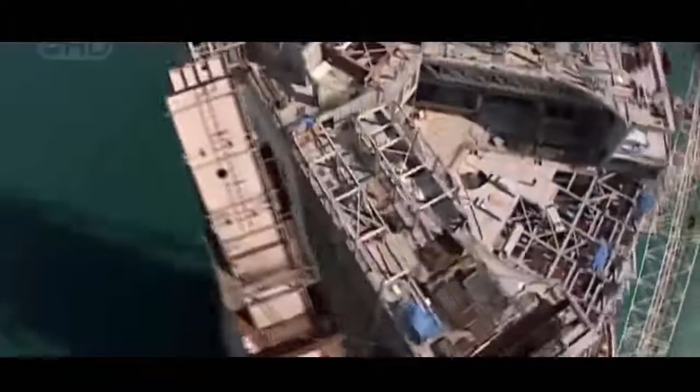Out off the coast of Dubai is one of the most incredible buildings on the planet. At 321 meters, it soars higher than the Eiffel Tower. It's the tallest hotel on Earth, and possibly the most luxurious. A structure designed to amaze. Its name means the Arabian Tower. This is the Burj Al Arab. But creating this 21st century icon will be an epic struggle that pushes everyone involved to the limit.

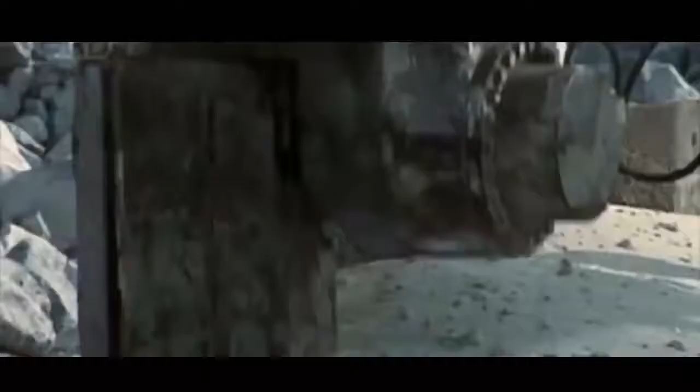In November 1994, construction begins on what is planned as the world's tallest and most luxurious hotel. The pressure is on from day one. With the eyes of the world watching, no one on the project will want to disappoint this particular client. Sheikh Mohammed bin Rashid Al Maktoum, Dubai's crown prince, is the visionary behind this amazing building. The project is his response to the economic time bomb his country confronts.

As his close advisor, Sultan bin Sulayem knows all too well. He knew that we don't have oil. He knows that oil is going to end someday. And they have two choices. Either go and do something about it and find other alternative ways to sustain the life for the people of Dubai, or sit waiting for help.

Only 50 years ago, Dubai's a dusty backwater, home to pearl divers, coastal traders and Bedouin. Then, in the 1960s, prospectors discover oil. The sudden injection of billions of petrodollars transforms the sheikhdom. But geologists predict the oil boom will be over by 2016. The good life could end just as quickly as it began, when the wells run dry.

The answer to Dubai's economic survival lies in its geography. This tiny emirate, less than twice the size of London, is in the remote Arabian Gulf. But Dubai has three untapped assets: sun, sand, and sea. Facing future economic meltdown, Sheikh Mohammed makes a crucial decision. He will turn his country into one of the world's most exclusive holiday destinations, a playground for the rich on the Arabian Gulf Coast. The Sheikh needs a luxurious centerpiece to launch his country into high-end tourism.

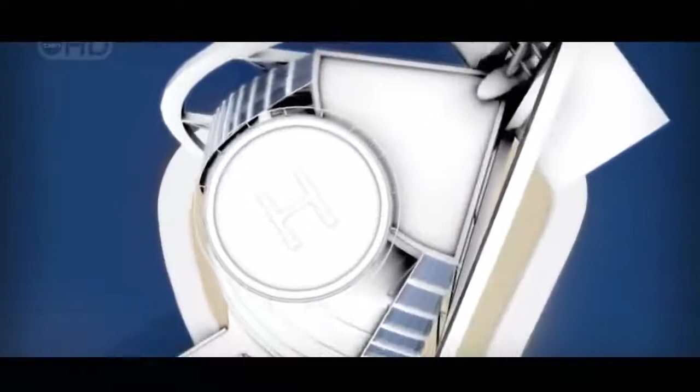He stakes what some speculate is over $1 billion on the tallest, most lavish hotel in the world, with a unique 7-star reputation, the Burj Al Arab. I think it was very important to put Dubai on the map of the world. There's no hotel like this hotel. It takes guts, and Sheikh Mohammed has a lot of guts.

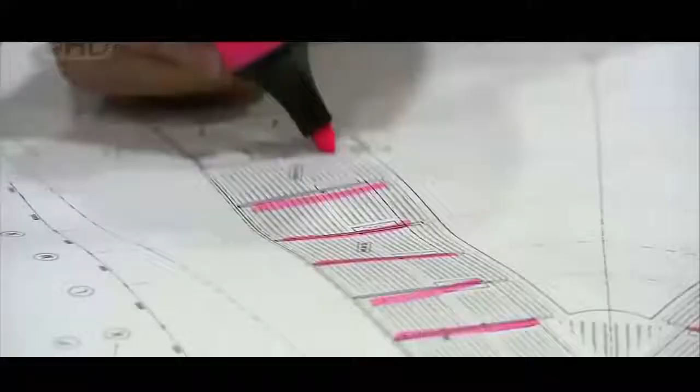The Sheikh's courage is clear from his choice of architects. A radical young team from Britain, brave enough to take up the challenge, but very short on experience. They are led by Chief Architect Tom Wright. We had an average age of 32. Not a grey hair between us. And none of us had gone over about 15 stories. I was quite staggered by the scale and the immensity of the project. Tom Wright and his colleagues have a reputation for innovative engineering, but they're more used to designing schools and offices.

But Dubai is a place where connections can make all the difference. Through a contact in the ruler's office, the team gets its break. Sheikh Mohammed agrees to a meeting and is so impressed with their initial concepts, he awards them the contract. Now Wright must turn his sketches into a design so remarkable, the building becomes a world-renowned landmark. We had many sleepless nights worrying that the building we'd designed wouldn't turn out to be at all iconic. Wright knows he must push his design to the limits.

A building only becomes an icon when its form is simple but unique. We decided that if you could draw a building simply with a few strokes of a pen, and it was instantly recognisable as not only the building but the place, Egypt in this case, you'd created something that was iconic. So if you consider these buildings in the world, there are probably no more than 10 maximum that have actually achieved this status. Australia, Sydney Opera House. As with all these buildings, it's usually just the first couple of lines that actually make you know exactly where the building is. Paris. And you have to put a flag on the top.

Can Tom Wright and his team compete with the likes of Gustave Eiffel? This is a once-in-a-lifetime challenge. All the brainstorming pays off when Wright finally has his eureka moment. We were sitting there having a beer, watching the modern sailing yacht come out of the Dubai Offshore Sailing Club. You think of excitement, you think of exhilaration, and we went, hey, this must be the one. The form we came up with is very simple, and within a few lines, I think you can see that it has all the elements of an iconic building. It's simple and instantly recognisable.

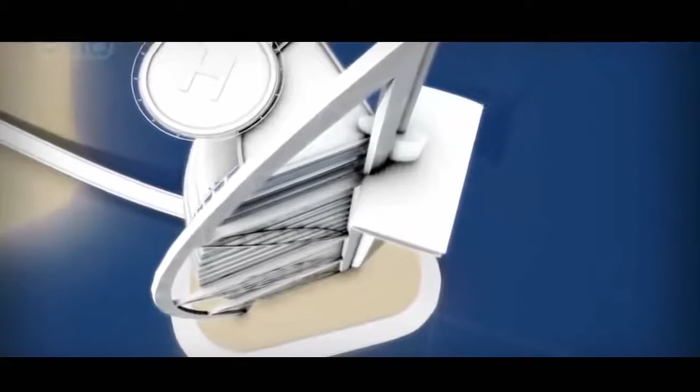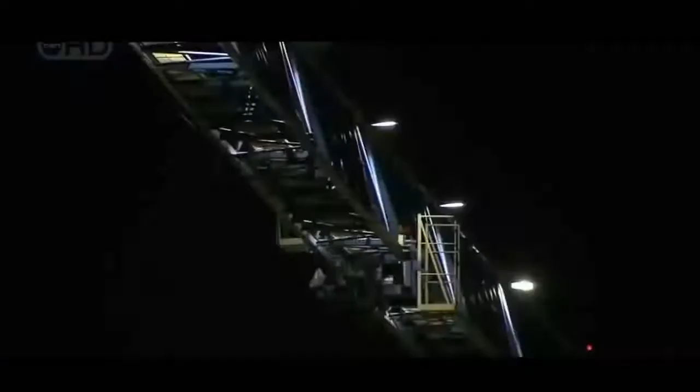By early 1995, the construction team is hard at work on Phase 1, building a low-lying island. But the inexperienced architects are about to get a taste of Dubai's extreme weather. April the 27th, a powerful storm known as a shamal sweeps across the Gulf, hitting the coast with a vengeance. A set of construction barges lie in its path. Each is laden with 10,000 tons of rock.

The architects have planned for all weather conditions, but the storm's intensity still shocks Simon Crisp. We had 3 or 4 metre waves bashing onto the beach. To see the waves coming in like this was really quite a wake-up call for us. One huge barge breaks loose and slams into the mainland. The team realizes the damage this kind of storm could inflict on their island hotel.

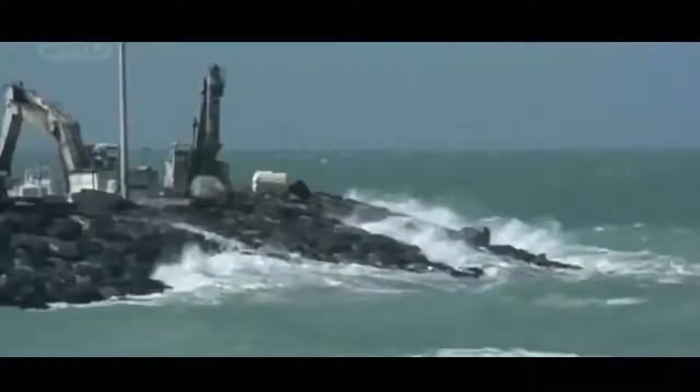We had a really graphic example of how powerful the Arabian Gulf can be when it's angry. The architect's decision to expose their structure to these forces could have serious consequences. The engineers will have to struggle to produce a low-lying island capable of resisting nature's fury.

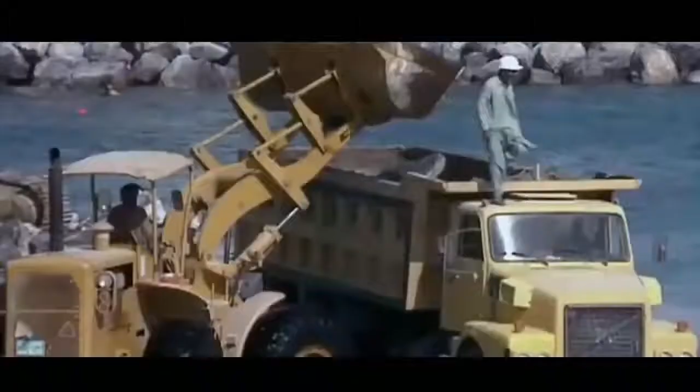The man-made island for the world's tallest hotel has hit a critical stage just 5 months into the build. Dubai's Sheikh Mohammed is depending on this project, the Burj Al Arab, to convert his country from oil producer to top-class tourist destination. But a debate rages over the island's height. Architect Tom Wright wants to make it low to give the impression of a sail rising out of the water. We argued a lot about the height of the island. From a design point of view, I wanted people to be close to the sea.

From the start, he's gone head-to-head with engineer Mike McNicholas, who's responsible for the island's safety. So I wanted the island as low as you possibly could, you know, skimming the sea. I'm coming from the other end, needed to make sure we were protecting the island. McNicholas's worst fear is that waves breaking over the island could damage the hotel or even drag guests into the sea.

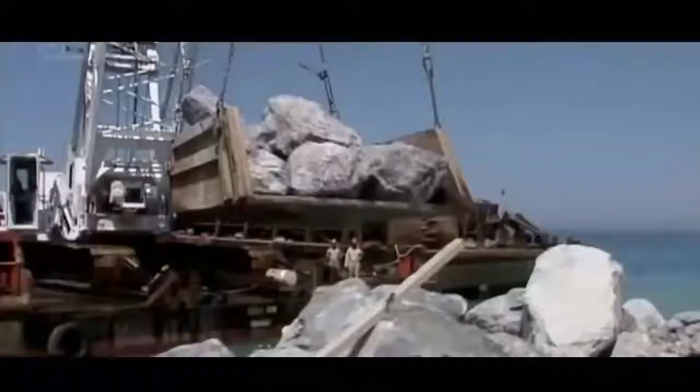Initially, the engineers planned to build the island using rocks. They are available locally and the technology is proven. But Wright rejects this. A rock island would have to be far too high to repel the sea safely. To keep the island low, McNicholas experiments with pioneering concrete blocks designed to reduce the impact of waves. But no one in the Gulf has ever used these blocks before.

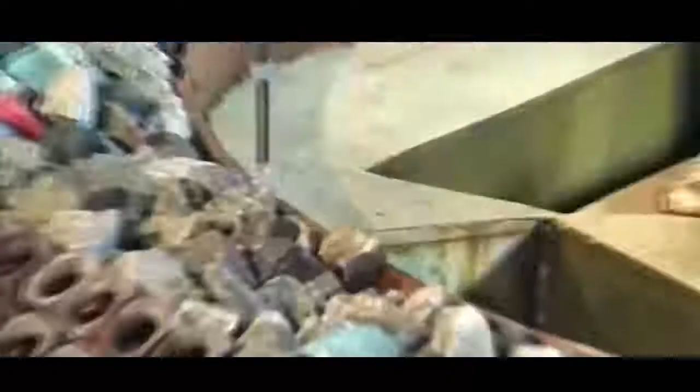I had to insist with the team that we carried out tank testing. It was the only way we were going to be sure that the island would be safe. These tests replicate the power of the tallest waves that can occur once in 100 years and send them crashing into a series of differently configured models. 3 weeks of testing prove the hollow blocks will work.

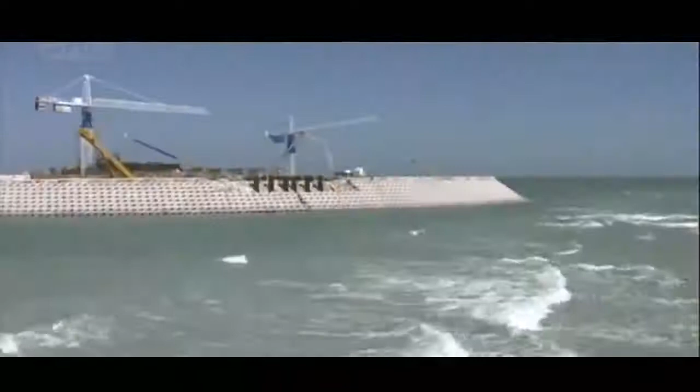The construction team builds the island with steep rock slopes, then covers them in concrete armor to absorb the force of the waves. These ingenious blocks work like a sponge. As the wave hits, the water passes inside the space and turns around on itself. The force is largely dissipated. With the engineers' help, architect Tom Wright has won his battle for a secure island that rises only 7.5 meters above the waves. Now the team begins the second stage of construction.

In the center of the island, construction workers drive huge lengths of steel 20 meters into the ground. This creates a triangular steel wall known as a cofferdam, which will become the outside of the hotel basement once they excavate the sand from inside.

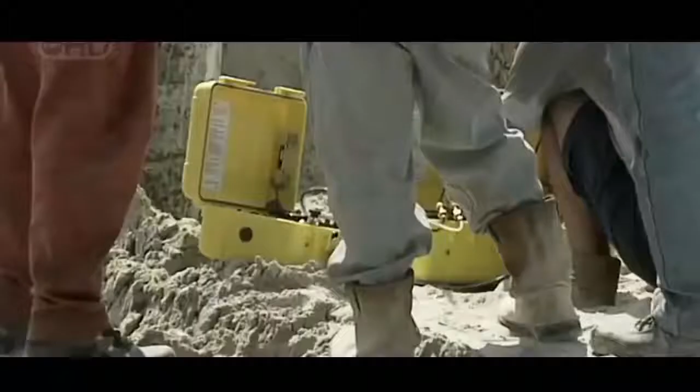But removing the sand could be dangerous. That was a real challenge for us. It's sleepless day and night, 7 days a week. How we were going to stop the seawater coming into the structure, how we were going to stop the seawater coming around our structure from beneath and flooding it. The weight of the sea is a huge force on its bed. This pressure forces water through the sand and threatens to flood the artificial island from beneath.

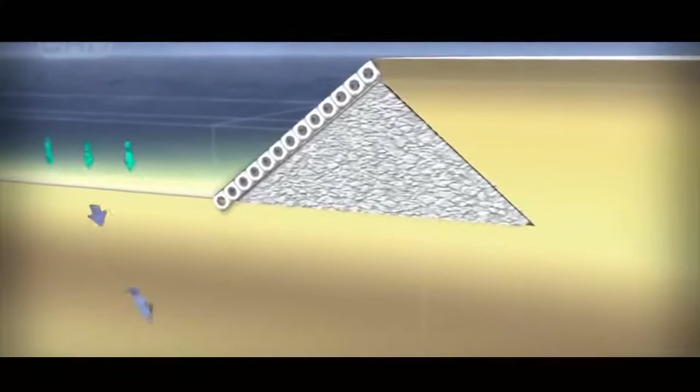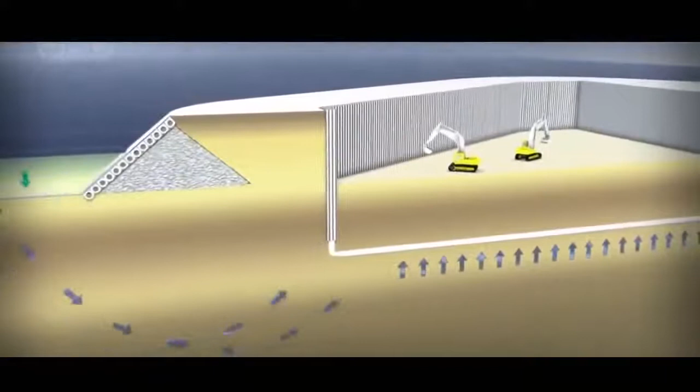To keep the sea out, McNicholas injects liquid cement into the sand to seal off his steel wall from below. But as the sand is removed to form the basement, there's less and less weight to hold back the force of the sea. The cement seal is going to be tested to the limit. In the worst case, the pressure caused by that water movement could have blown the whole bottom of the excavation like a champagne cork.

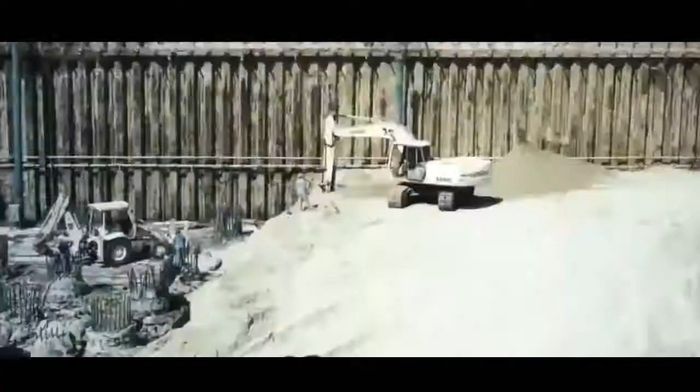If McNicholas's calculations are wrong, the excavation could be swamped, killing hundreds of workers. But he stands by his design. With the cement seal in place, the excavators begin to remove the sand. As the man responsible, he's not going to let the workers face the risk alone. I felt I had to be one of the first guys down at the bottom of the excavation, looking up 10 meters above myself, thinking, each side of this cofferdam is 7,500 tons of sea pressure pushing in.

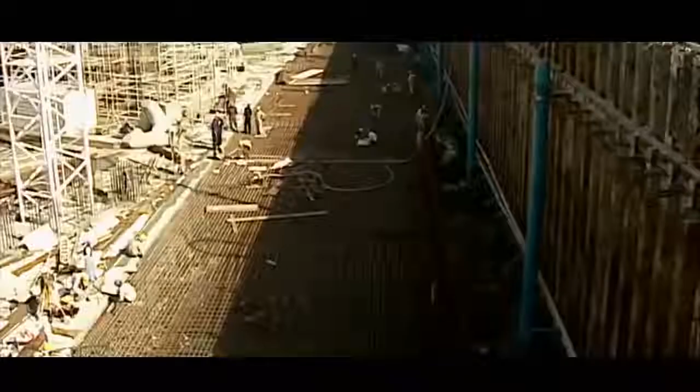When put to the test, both wall and seal hold firm. And one of the probably proudest moments of my career was being stood on that excavation and looking around and seeing the steel wall there surrounding me and thinking, we are holding back the sea. My design worked.

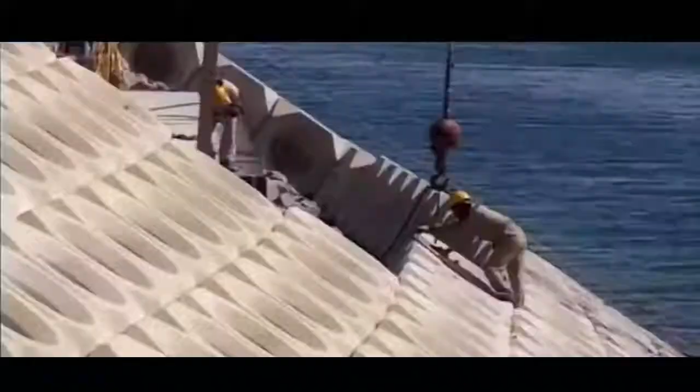November 1995. The artificial island for the tallest all-suite hotel in the world is now complete. The construction team starts phase 3 of this one-off project, the foundations. The support needed for any skyscraper is vast. But the location of the Burj Al Arab presents an added challenge. It's never been done before to build something like this on reclaimed land. I mean, we're talking about a 300-metre high tower on a man-made island in 6 metres of the Arabian Gulf.

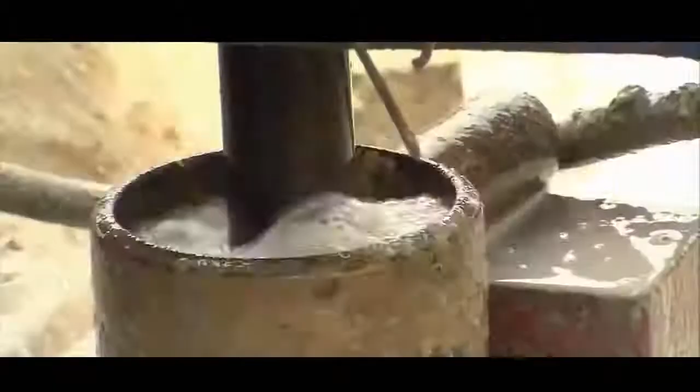The problems multiply when the results of earlier core tests reveal bad news. The team searching for bedrock drilled deep into the seabed. But even a full 180 metres down, there was no solid rock. This will make their job tougher, but the architects remain defiant. The average person would think we're crazy to build something like this on sand, let alone out in the water. How will this 300-metre structure stand firm against earthquakes and winds of close to 150 kilometres an hour when its foundations depend on nothing more substantial than sand?

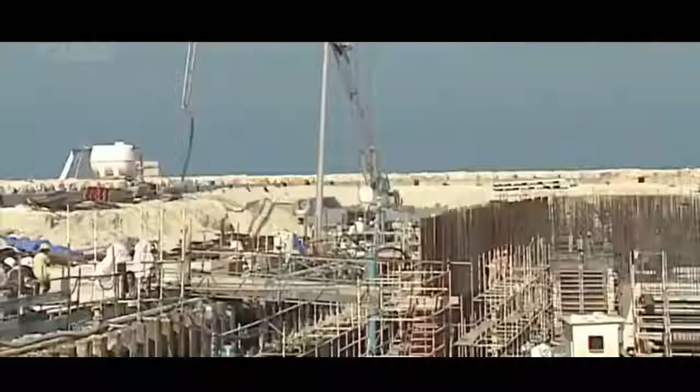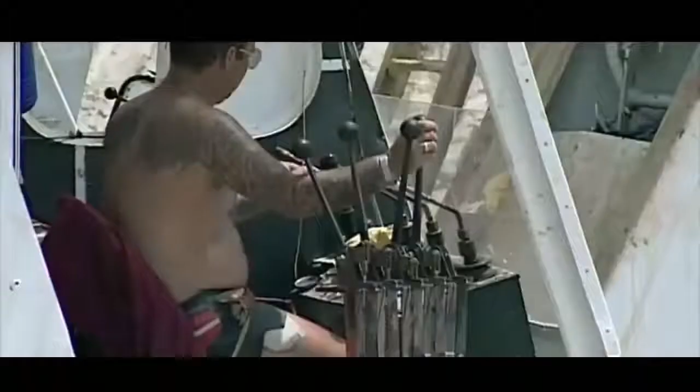On an artificial island 270 metres off the coast of Dubai, construction workers are preparing the ground for the tallest hotel in the world, the Burj Al Arab. But there's no bedrock beneath the site to support the foundations for a skyscraper. The architects have a plan. They want to support the Burj using steel-reinforced concrete foundation piles drilled deep into the sand. So, what's to stop the whole structure from just sinking? They are relying on an effect known as skin friction, the resistance that stops two rough surfaces slipping past each other.

Skin friction is all about the contact between the sand and the surface of the pile. And the longer the pile, the further in the ground it is, the greater that effect. And I'm going to demonstrate it now by whacking it in. You'll see it starts to move quite quickly with the first few impacts. Now it's starting to stiffen up a bit, even though I'm not hitting it any harder or any softer, and the skin effect is starting to really kick in here. Once the friction between the post and the sand around it equals the load of the hammer, the post comes to a halt.

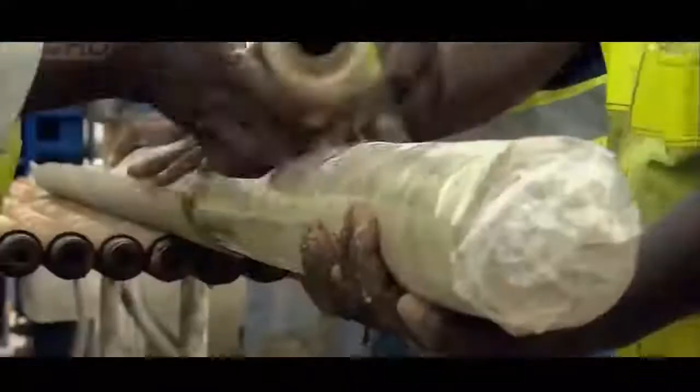The scheme will only anchor the Burj if the sand is compacted enough to create resistance around the building's piles. The drillers pack sand samples into sealed containers and send them off to be analysed. If the results show the sand is too loose, then support on the piles anchoring the building could suddenly fail. The geography of Dubai gives everyone reason for concern. It lies within range of a major fault line, so this soaring megastructure could be vulnerable to earthquakes.

In June 1964, a 7.5 magnitude earthquake hits Niigata in northern Japan. Because the area is built on sandy silt, the tremors flip over entire apartment buildings. This isn't normal earthquake collapse. It's a devastating phenomenon known as liquefaction.

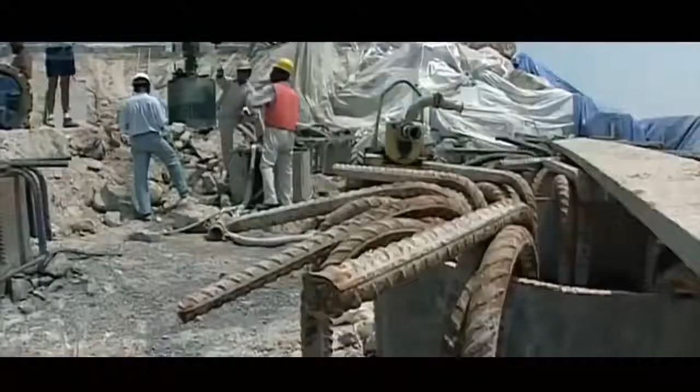As grains of loose sand shake, they fill up any air pockets and compact, taking up less space. The ground stops behaving like solid earth and acts like a liquid. On shifting sand, any building could simply topple. When the results of the drilling tests return, it's good news. Deep beneath the site, they find compacted and calcified sand. Liquefaction is not a threat.

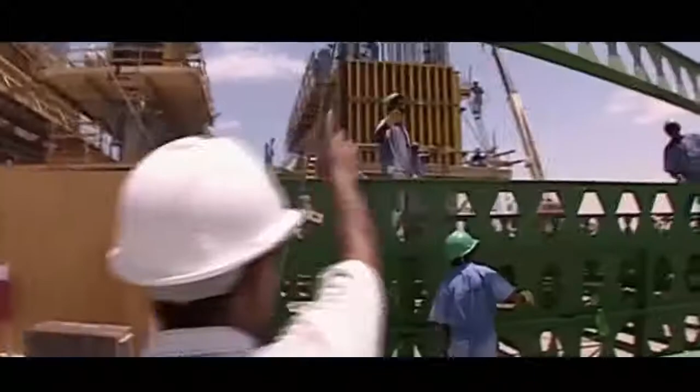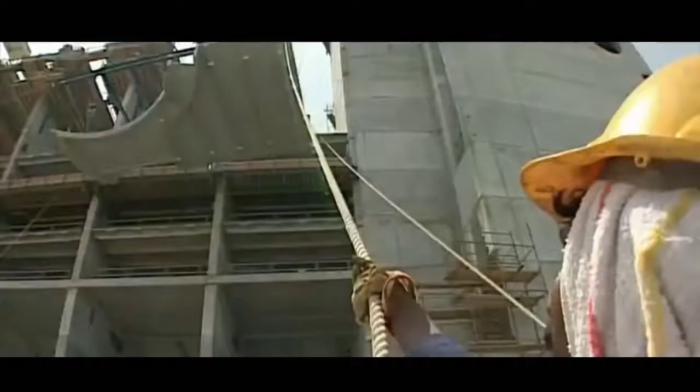One by one, the engineers are solving the challenges thrown up by this extraordinary structure. But in 1996, they brace themselves for a new set of obstacles as Phase 4, the construction of the hotel itself, begins. This building had to stand up to the worst that the Gulf could throw at it. The hotel itself has slender concrete walls, not capable of withstanding the elements alone.

To hold them firm against high winds and earthquakes, the architect devises a visually stunning solution. A gigantic steel structure outside the main building, known as an exoskeleton. A series of vast diagonal trusses tie two huge steel bows to the concrete core at the back of the building. Wright's design will make the building unique.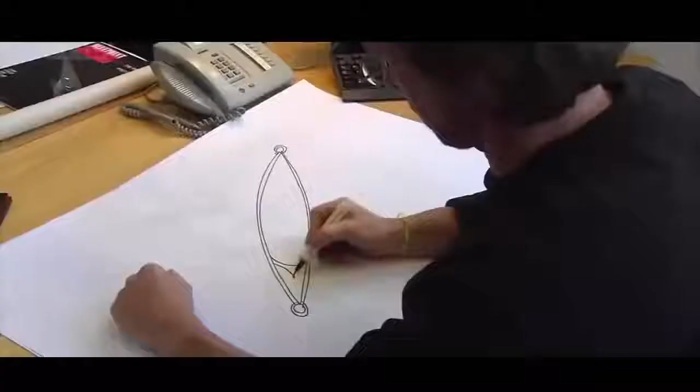But his giant diagonal trusses will make life hell for Anthony McCarter, the engineer who has to make them work. Those trusses gave me 4 months of heartache, sleepless nights, worries, anxiety. They must be incredibly strong to tie the exoskeleton together. But aesthetics are just as vital. It was critical that these diagonals were very, very elegant and also very beautiful as they're so visible.

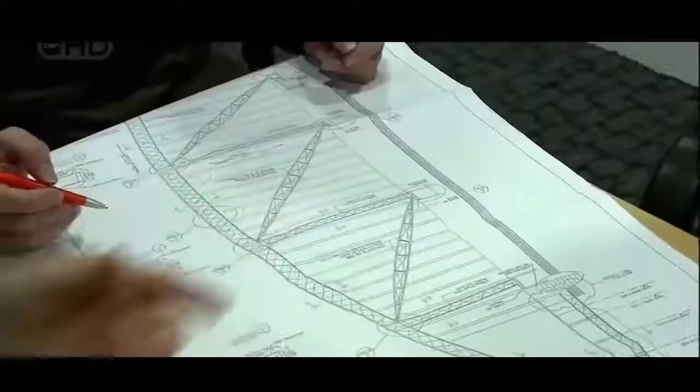This building has to wow the world and make Dubai a must-stop destination. Wright's not about to compromise. I used to go to Tom with option after option. I remember one particular occasion where I had 7 options and he went, no, no good, no good, no good. Eventually, McCarter finds a form that works structurally and is graceful enough to fit Wright's vision.

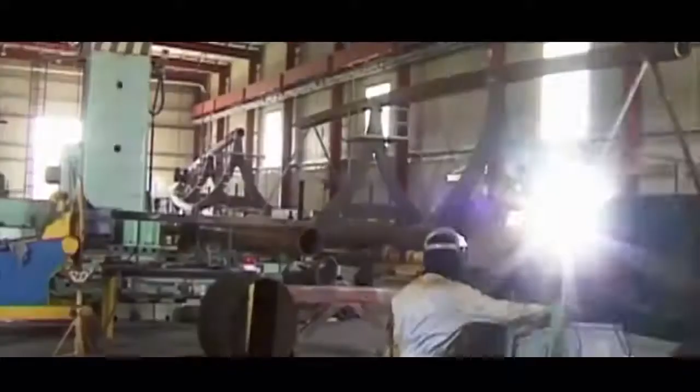But this in turn causes nightmares for Malcolm Murphy, the chief contractor. It's okay for the architect to draw pretty pictures, but we have to build it. He finds a factory just 15 kilometers from the construction site capable of welding the huge diagonals. Each one is longer than the Airbus A380 Super Jumbo and heavier than 20 double-decker buses. Welding these complex forms in the factory is the easy part. Transporting them to the site is not.

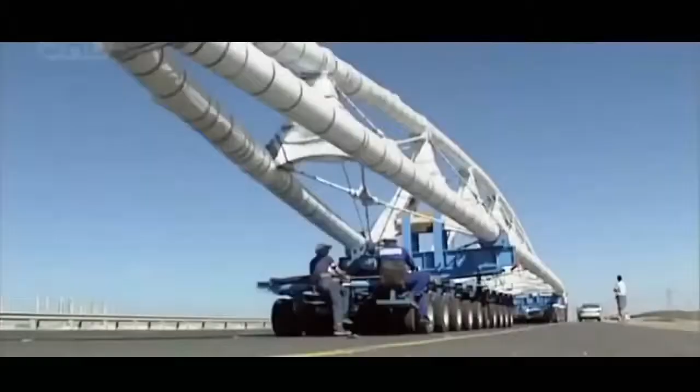With each truss weighing in at 165 tons and reaching a staggering 85 meters in length, it's no easy task. And the challenge is to do that. It's just unbelievable. No one has ever transported anything this size before in Dubai. But Murphy's not going to be beaten. He brings in one of the world's largest heavy lift transporters, a beast with a total of 80 wheels. It makes the slow journey to the construction site at an average speed of around 6 kilometers an hour. Police must close roads and remove traffic lights to allow this convoy through.

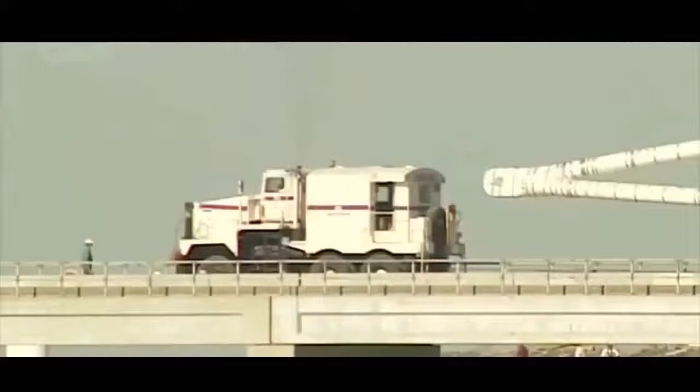When they finally reach the site, the contractors face their next hurdle. These 165-ton beasts have to be lifted into position. The architects refused point blank to position these things in 3 pieces, which we wanted to do originally. And he said, no, aesthetics, I'll not allow you to weld up there. He has to find a way to lift the trusses in a single piece to a height of almost 200 meters, twice the height of the Statue of Liberty.

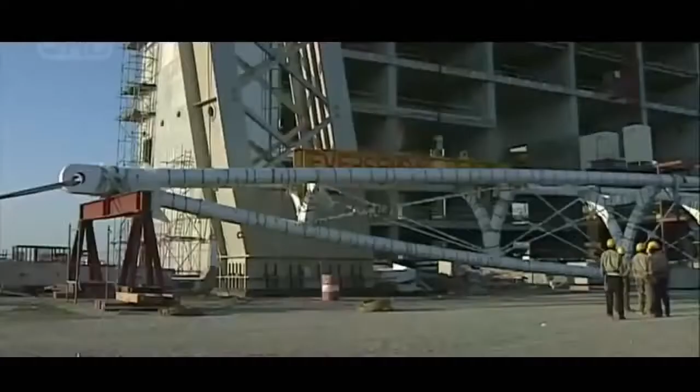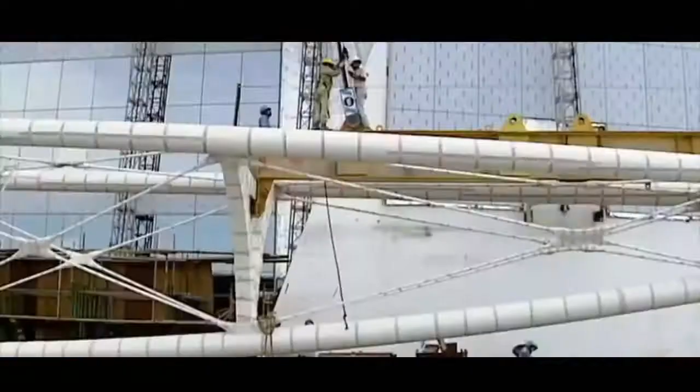We had to go away and think of an idea how to actually lift these monsters up. We had 3 big monster cranes in there, and even they weren't big enough to lift the diagonal trusses. Murphy must look further afield for a solution and brings in specialist lifting gear from Singapore. His team sets up winches, like those used on offshore drilling rigs, high on cantilever frames 15 meters from the building. Cables with a breaking strength of 225 tons are attached to the end of the truss.

I can assure you we were very, very nervous that morning when we lifted the first one. 30, 40 guys had sleepless nights that week, getting ready for that first lift. The 2 massive winches take up the strain and then painstakingly raise the diagonal truss little by little up the side of the building. It's all going to plan. Murphy and his team have solved the lifting dilemma.

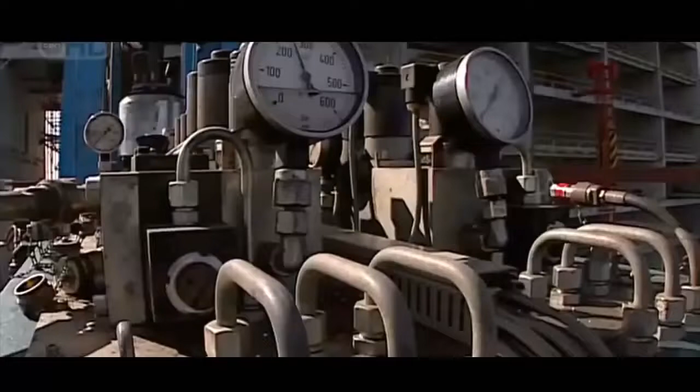But these trusses have a sting in the tail. They need to fit into place with pinpoint accuracy. But Dubai's climate means temperatures can vary by as much as 14 degrees in a single day. And this will make the trusses expand and contract dramatically. The problem's known as thermal expansion.

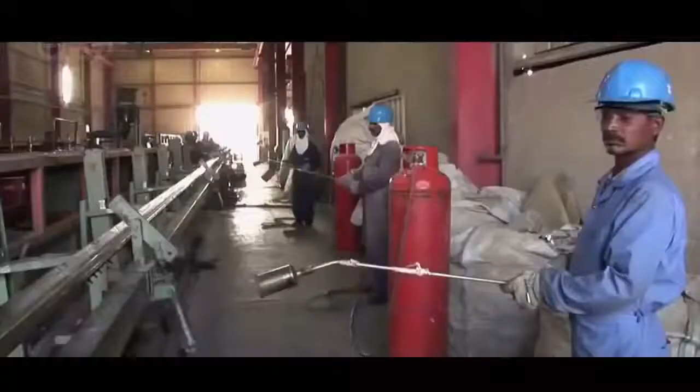The steelman's nightmare in the desert, working 50 degrees C. Steel expands in the heat and contracts when cold. Okay, chaps, light up. We're actually going to heat the steel up now, which is going to give you an idea of what temperatures we're working in the desert.

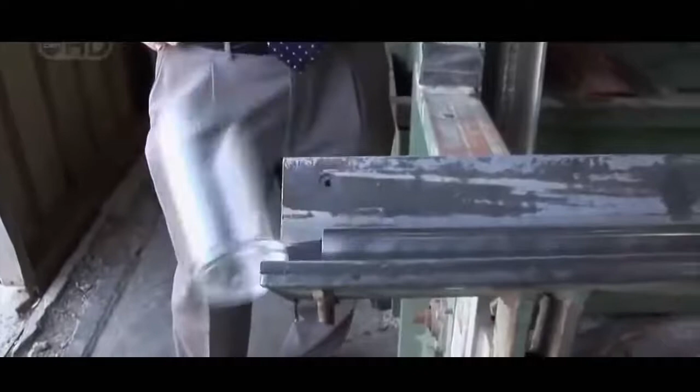Heat makes the steel molecules move faster and further. And this 15-meter tube actually grows in length. The difference is visible. What did I tell you? Steel does expand with the heat. The diagonal trusses on the Burj Al Arab could expand and contract by a full 5 centimeters over a 24-hour period. They will never fit their precise point in the framework without an ingenious solution.

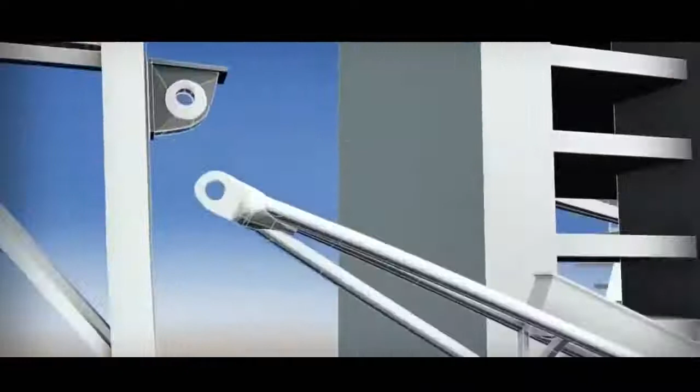The engineers thought about it, the structural fabricators, the steel fabricators, the architects, everybody thought about it, and it was actually one of the architects came up with this great solution. On the frame of the structure, the fixing bracket contains a vast washer with its hole offset from the center. This swivels until it lines up with the hole in the diagonal truss. Then, the cast steel pin, about 30 centimeters in diameter, is inserted through both holes, locking them together.

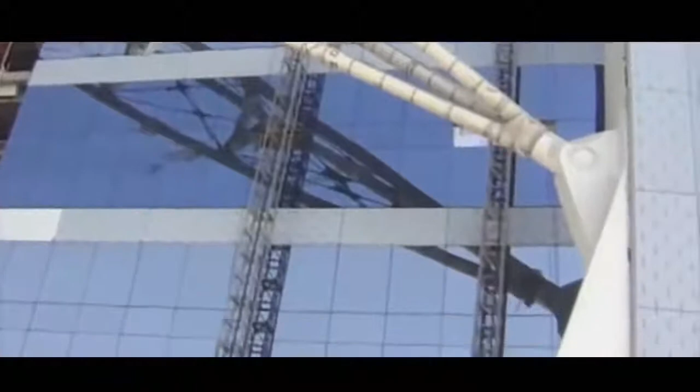This clever device buys the team the crucial 5 centimeters of play they require for the installation, and the truss is now fixed securely in place. When we got that pin in, we had those champagne corks flying. It was just unbelievable. But there's precious little time for celebration. The first VIP guests will arrive before the millennium. This leaves the team less than 36 months to complete the entire project. Sheikh Mohammed's vision for the Burj Al Arab meant that it was needed yesterday.

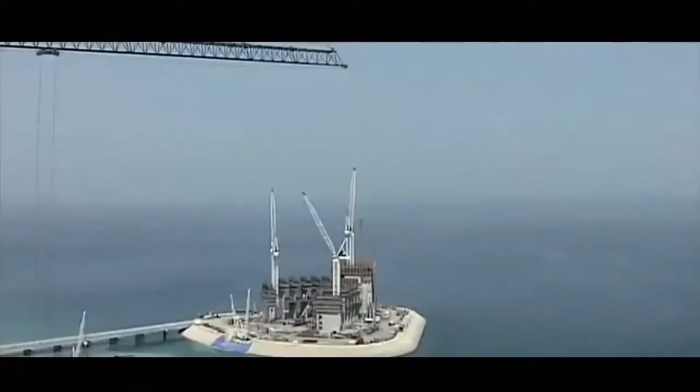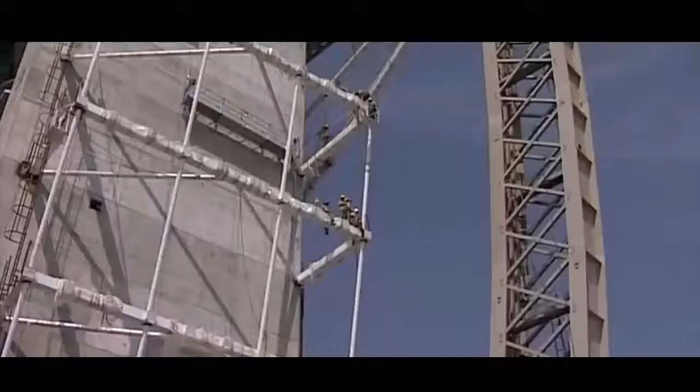January 1997. A colossus is emerging out of the Arabian Gulf. The Burj Al Arab is to be the tallest hotel in the world, the last word in luxury and a proud symbol for Dubai. Architect Tom Wright wants the building to be beautiful. The steel sections of the exoskeleton that will support it must be as minimal as possible. The view from these $2,000 a night suites will have to live up to the price tag. When you're in the suite, looking through the windows, they are right in front of you, so they have to be exceptionally well detailed and well put together.

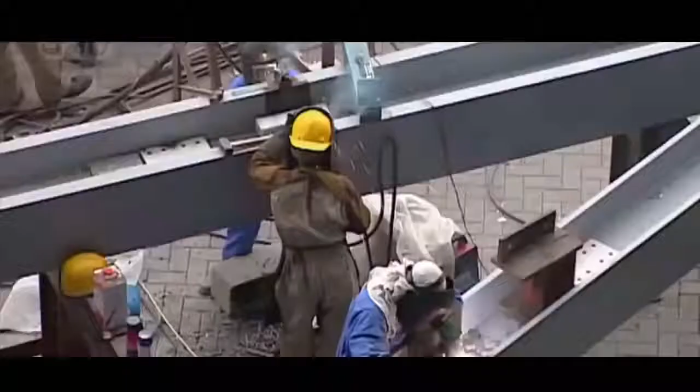But this creates a dilemma. If Wright makes the exoskeleton too light, the wind's force at 300 meters above the Gulf could shake the building apart. Too bulky, and the elegant form of his yacht-shaped structure is ruined. Once again, Wright and the engineers, who must make his hotel safe, are on a collision course. When you're designing a building that is taller than the Eiffel Tower, and you've never done one before, you want to make sure that you've got it right. This structure is so unusual. For the first time in Dubai's history, engineers decide to do tests in a wind tunnel.

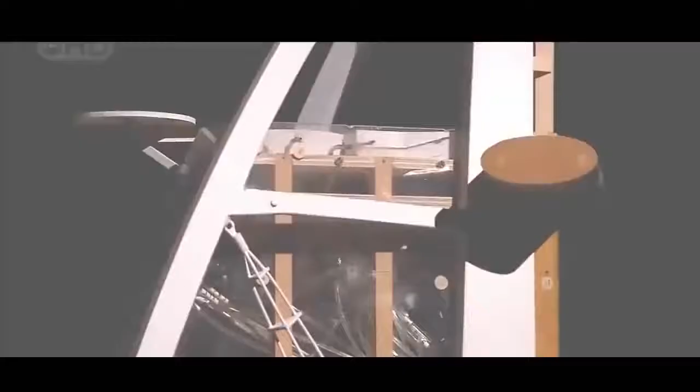Wind engineer Volker Butgereit knows the Burj Al Arab is one of a kind. Before this building came along, most of the buildings in the Gulf were fairly orthodox shape. They were square, they were rectangular, they were nowhere near this scale. So doing a wind tunnel test for a building in those days in the Gulf was almost outrageous. But for this extraordinary structure, it's essential. The wind tunnel simulates the wind effects of the Gulf around this 1:50 scale model.

This building has seen some pretty severe loads, almost twice what it would see in London. We measured suctions which were the order of a weight of a car hanging off, trying to suck the panel off the building. So that's quite something. The wind tunnel throws up results that could threaten the entire exoskeleton. When we first saw the design, there was immediate concern about vibration due to something called vortex shedding.

Vortex shedding is an engineer's nightmare. Certain wind conditions blowing over sharp edges on the steel structure can create miniature tornadoes. These set up dangerous vibrations that can shake a building to destruction. Which is exactly what happened to these massive cooling towers in Ferrybridge, Northern England, in 1965. The engineers must find a way to protect the Burj Al Arab.

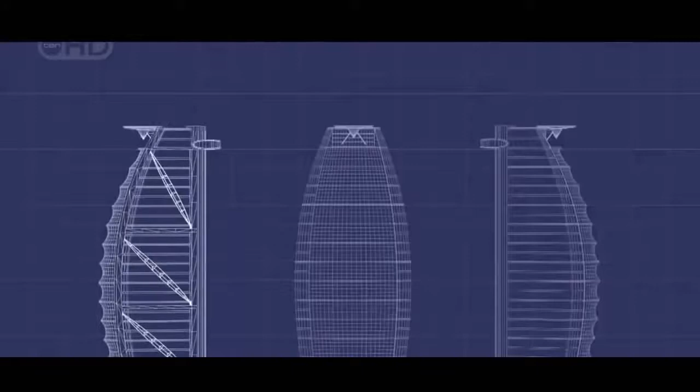The simplest solution is to change the aerodynamic shape, but that upsets the architect. The architectural idea of the exoskeleton structure is, when you look at it, the very essence of the building. If you take it off, it's just another building. If you put the exoskeleton structure on, you know, you have an icon. The engineers need to think again.

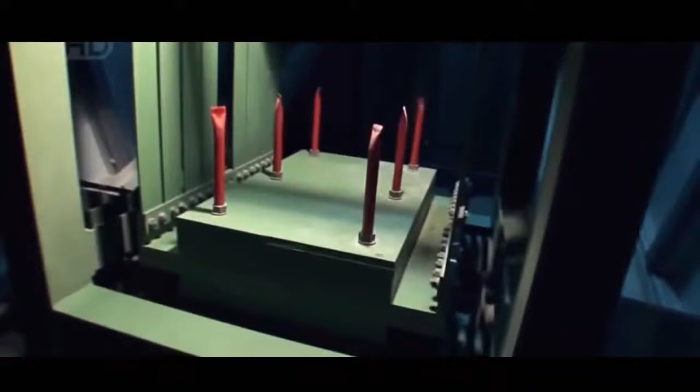This is classic vortex shedding. We realized we had to come up with something clever that was not visible, but somehow reduced the motion. They turn to an ingenious hanging weight called a tuned mass damper. These are installed at vulnerable points in the exoskeleton.

When the wind blows and vortex shedding starts to create dangerous vibrations, the 5-ton weight will swing instead of the structure and damp down the vibrations to well within safety limits. 11 of these systems are fitted from the top of the 60-metre mast all the way down through each of the steel bow structures. These dampers safely cancel out the threat.

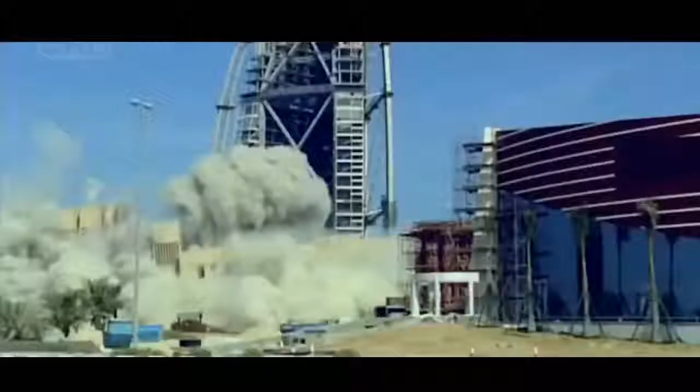June 1997. Dubai is reinventing itself as the luxury tourist destination. This old hotel bites the dust as the Burj Al Arab, the symbol of the new Dubai, approaches its final form. Just 30 months before the deadline, the crew begins constructing the toughest engineering challenge.

Sheikh Mohammed wants the building to amaze, so the design calls for a restaurant that looks as if it's suspended in the sky. I like the idea of the visitor sitting out in space, looking across the view towards the Arabian Gulf and Dubai, and sort of almost floating up in the clouds. The whole idea of hanging out over space would give you a dining experience pretty unparalleled.

The Al Muntaha, or Ultimate Sky View Restaurant, will soar 200 metres above the sea and project nearly 27 metres out on both sides from the building's narrow central core. Once again, Wright's throwing down a gauntlet to structural engineer Anthony McCarter. Can he secure this eccentric wing-like structure with no visible means of support?

When Tom first showed it to me, I must admit I thought it was crazy. This room is actually the size of most buildings, and Tom decided that he wanted to take it and stick it outside of the centre of gravity of the supporting structure. So there it was, dangling in the breeze with only the structural engineer to hold it up. And if the engineers get the calculations wrong, the whole thing could tumble 200 metres to Earth.

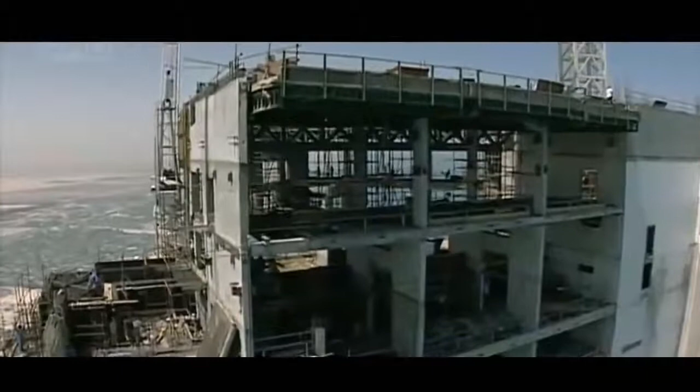McCarter finds a solution to the pull of gravity that pushes conventional engineering to new heights. In the concrete core at the back of the building, he casts a series of steel brackets known as embedments. 10 enormous steel girders radiate off them up to 1.6 metres high. These beams form the base of the rigid steel floor.

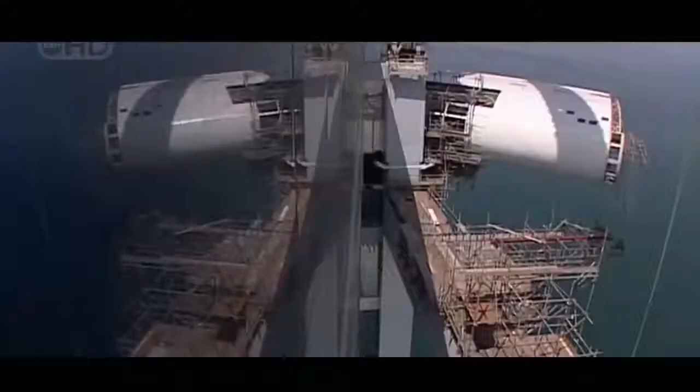The wing-like exterior can be attached to it, and then the entire restaurant is enclosed in aluminium and glass. This gravity-defying structure will survive winds of close to 160 kilometres an hour. It's an engineering triumph. But they are just 4 years into the 6-year program. No one can afford to take their foot off the gas.

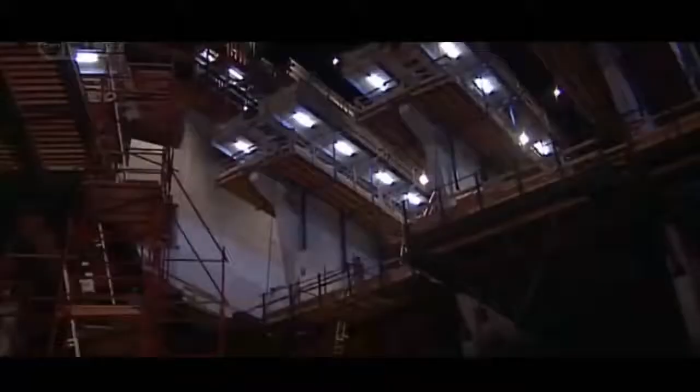The program was relentless and challenging. 24-hour working, 6 o'clock site meetings in the morning, every morning. You live, sleep, breathe the building. The challenge really was on: can we design it and finish it by the original program? The Burj Al Arab is due to open in time to celebrate the millennium, just 2 years away.

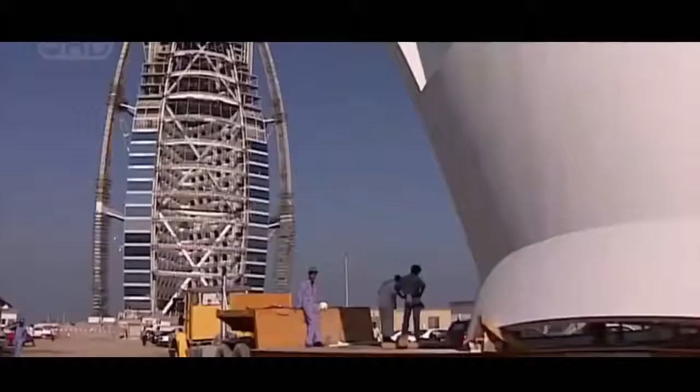The world's media are watching to see if the hotel will be the masterpiece the Sheikh promises, and if the team can complete it on schedule. The only way to deliver on time is to start the interior decoration long before the exterior is finished.

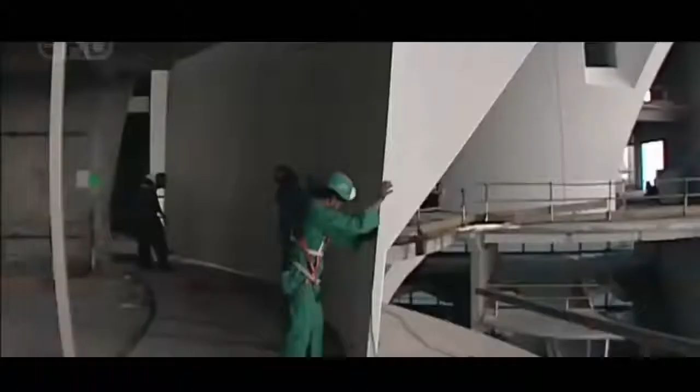In a temperate climate, this wouldn't be an issue, but humidity in Dubai reaches 100%, and temperatures can soar to a scorching 49 degrees. These conditions simply won't allow the team to fit delicate finishes like gold leaf, silk and carved wood. If we'd started to put materials that were susceptible to moisture at that time, they would have just fallen apart. To make the deadline, the contractors need to air condition this giant building site and bring the temperature down dramatically.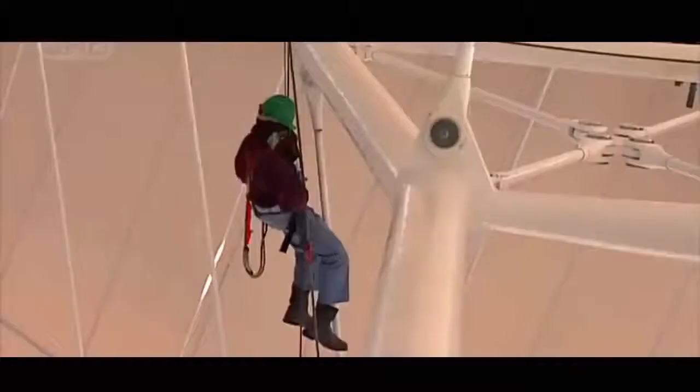The first step is to enclose the building by installing the final wall, Wright's iconic white sail. But it's going to be tough. When we first proposed the idea of the fabric sail wall, there was a lot of scepticism. People thought that it couldn't be done. They stretch woven glass fibre sections between huge horizontal beams. The surface is pre-coated with Teflon to resist dirt and sand.

The result notches up another first for the Burj, the largest fabric wall anywhere in the world. The reflective properties of the white sail will help keep the temperature down. But the contractors still need to find a way for trucks to enter the building without allowing in the desert heat. The solution is to install a huge airlock. Trucks drive in, the vehicle pauses as the doors close behind it. A second set of doors then open, and the vehicle moves out of the building.

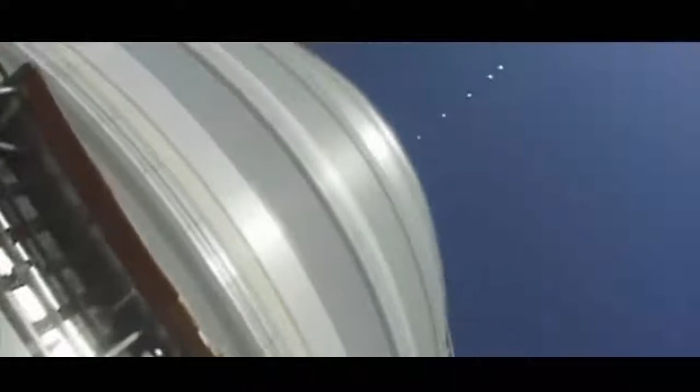The airlock and the sail wall now seal off the building. But cooling a space this large during construction could create a major setback. This unique structure now boasts the world's largest atrium, soaring to an amazing 180 meters. All this warm air can hold far more water vapor than cold air. If they cool this hot, humid environment too quickly, they will create uncontrollable condensation.

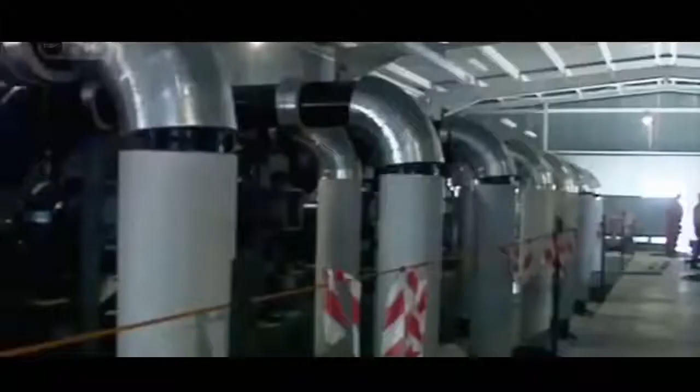We could have had a rain cloud form at the top of the atrium and create massive damage to the interior design. The only way to avoid rain clouds will cost valuable time. The contractors switch on the giant cooling system and bring the interior temperature down steadily by less than 1 degree a day. Given the schedule, it's painfully slow. We started to cool the building down in June 1998. By December 98, it was pretty well down to temperature.

At last, the interior decoration can begin. But the hunt for a designer who can create interiors worthy of a sheikh causes further delays. Khuan Chew, who's already worked for the Sultan of Brunei, knows exactly what it takes to satisfy royalty. It's great news when she agrees to take on the most luxurious hotel on the planet, with its daunting 202 palatial suites and the 180-meter atrium.

But she has just 24 months from design to completion to be ready for the guests booked in for the millennium. I had a very, very tight program. So what we did was that the entire office, all 50 designers, just dropped everything else. Solidly, we just worked on the Burj Al Arab. She not only faces a frantic schedule, Sheikh Mohammed is expecting her to amaze the world. The brief basically asked us to design something that's never been designed before, and that will never be designed ever again.

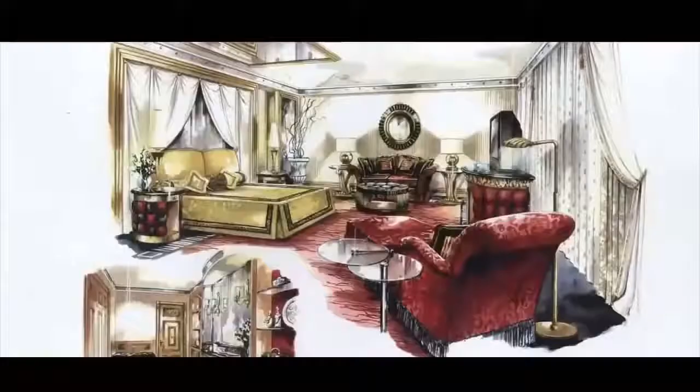Khuan Chew and her team pull out all the stops and begin to produce interiors they hope will match the Sheikh's ambition. But as they struggle to meet the deadline, another more severe problem comes up. The Sheikh wants to offer guests every conceivable electronic gadget in their suite. This new requirement could have dangerous consequences. A new member of the team is suddenly in the hot seat. Electrical engineer Rob Roos faces the biggest challenge of his career.

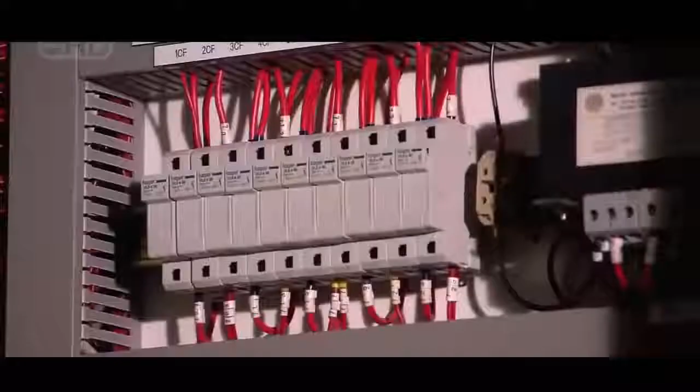There was a total redesign or a total change in the interior design, and that imposed overnight almost a 50% increase in the electrical load of the building. The Sheikh's new plans mean each suite requires an enormous 14 kilowatts. That's 8 times the load of a normal European house for every suite. With 202 suites, that's roughly enough electricity for a town of over 6,000 people. The hotel will have electric curtains throughout, 52,000 lights, most of them on dimmers, and over 5,000 kilometers of electric cable.

All these electronics can scramble the waveform of the electric current and create a problem known as harmonic distortion. This can melt the sheathing around live cables and cause a raging fire. That was a situation which was just totally unacceptable. We had to deal with that.

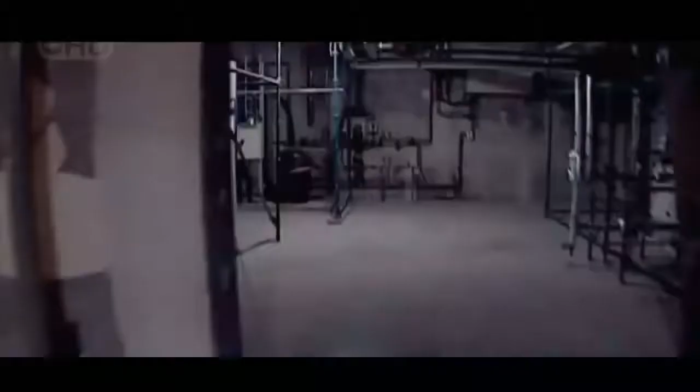The people of Las Vegas know just how lethal a hotel fire can be. November 1980. In the city's MGM Grand Hotel, a pair of electrical wires short-circuit. This causes a blaze that wreaks destruction. 85 people perish in this real-life towering inferno, and over 700 are injured. It's one of the worst hotel fires in history, all caused by a simple electrical fault. Roos needs a solution to the fire risk, and fast.

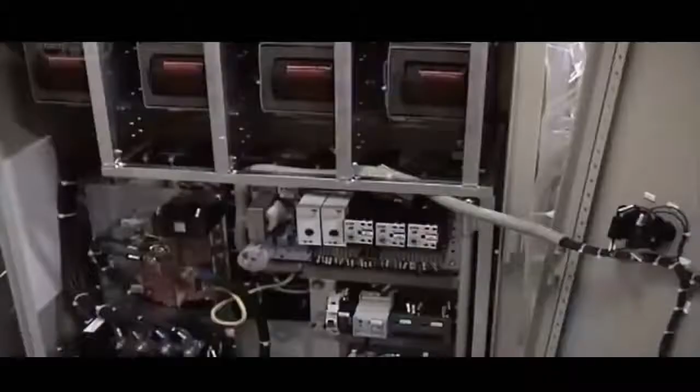Obviously the hotel was under construction. There were some fairly heavy deadlines to try and get the hotel finished and opened, and this was a major change. His response takes electrical engineering to a new level. He devises a harmonic filter system. First, it detects the electronic distortion, then it sends a current that's the mirror image to cancel it. It's called antiphase and works like noise-cancelling headphones.

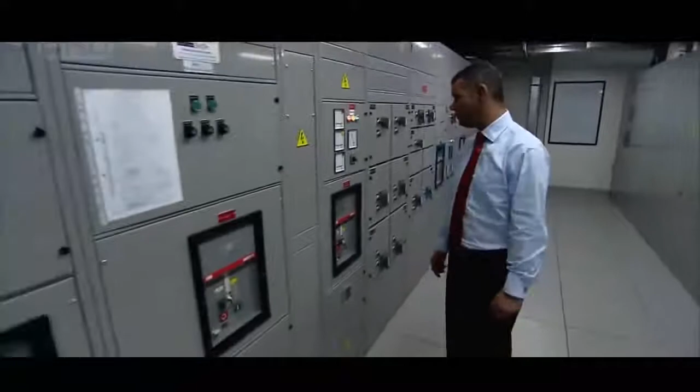He installs his filters on key floors and at the point the electricity enters the building. No one has ever attempted a system on this scale before. This was the largest active filter installation of its kind in a building like this anywhere in the world. A world-class solution for a world-class megastructure.

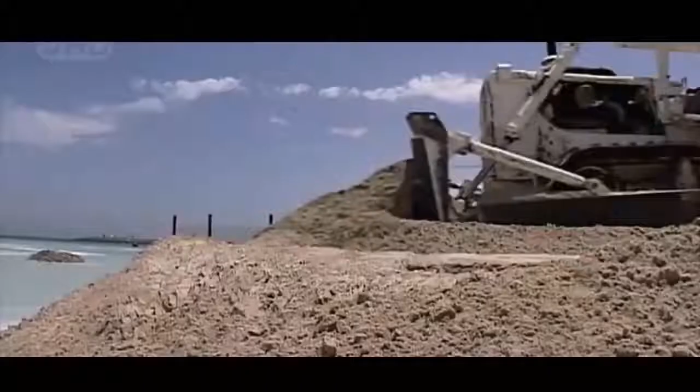The team constructing the Burj Al Arab can claim a string of groundbreaking achievements. They build the first artificial island off the coast of Dubai, construct the tallest atrium in the world, enclosed by the largest fabric wall ever built. And with the mast finally in place, this structure, for now at least, is taller than any other hotel on the planet.

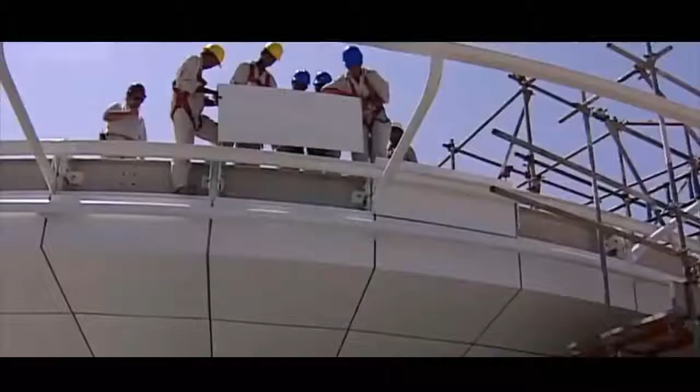Now, 5 years into the project, the team reaches an important milestone. The iconic exterior is almost complete, but the interior decoration of the world's most luxurious hotel is seriously behind schedule. This stage has always been a race against time. Now Sheikh Mohammed is about to send the design team into a tailspin.

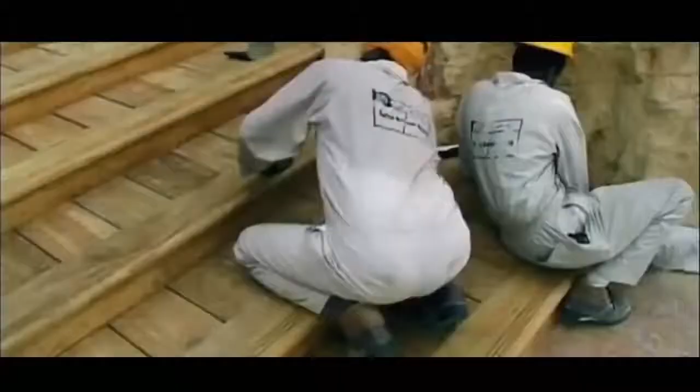Dubai, April 1999. The world's tallest and most opulent hotel is approaching completion. Everyone is rushing to finish the hotel, ready for the Millennium deadline. Interior designer Khuan Chew is still operating in overdrive. Christmas was cancelled, Easter was cancelled, bank holidays were cancelled. We basically made 50, 60-hour weeks.

Her brief from the Sheikh is to shock, to innovate, to amaze the guests with a modern Arab palace. And she delivers in spades, with over 24,000 square meters of marble from Italy and Brazil, the equivalent of nearly 3 soccer pitches. Over 8,000 square meters of 22-carat gold leaf give the desired impression of luxury. And she completes the appearance of total indulgence with crystal chandeliers, woven silver and velvet.

But for the world's largest atrium, Khuan Chew makes a radical decision. She goes minimalist. She lets the complex architecture speak for itself by painting it all white. The interior decoration is almost back on schedule. Then comes the moment of truth. Sheikh Mohammed arrives to examine her work and pass judgment. The man behind the whole project is delighted with the ornate styling of the luxury suites. But that's where the good news ends.

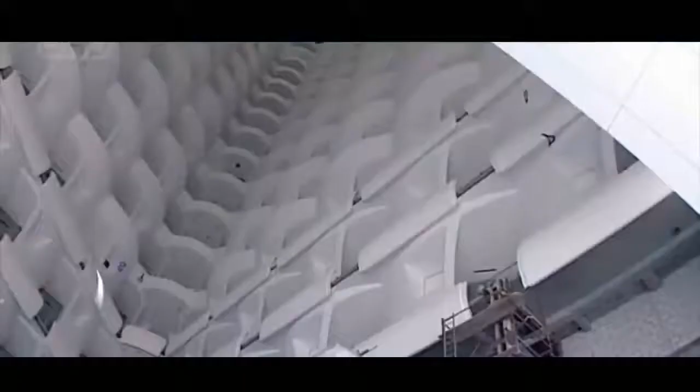Khuan Chew has to completely redesign and decorate the tallest atrium in the world in just 6 months. I was basically living and sleeping in the Burj Al Arab, rushing from area to area. This is her last chance to get it right, so she sets out to dazzle. She designs a light show to animate the world's tallest fabric wall. Fountains create aqua gymnastics in the lobby. Vast fish tanks welcome visitors as they ride the escalators. And crucially, she transforms the view up the atrium into a rainbow palette of vibrant colors.

Will it satisfy Sheikh Mohammed? Everyone's on tenterhooks. The adrenaline was pumping, you know, sleepless nights basically before opening. The Sheikh's response is a definitive yes. He's delighted and signs off on the project. Sheikh Mohammed believes it became almost a 6 to 7 star hotel. And the achievement of his dream, the realization of his dream.

The doors open to the first ultra-rich guests in December 1999, a full month before the millennium. And Sheikh Mohammed comes to watch the final sunset of the century from his magnificent new hotel. Architect Tom Wright and the team have fulfilled the brief. Every part of this iconic structure is extraordinary. In the ground floor restaurant, a team of divers care for 700 exotic fish in this 280 cubic meter tank. The result allows guests to get intimate with sharks while they eat.